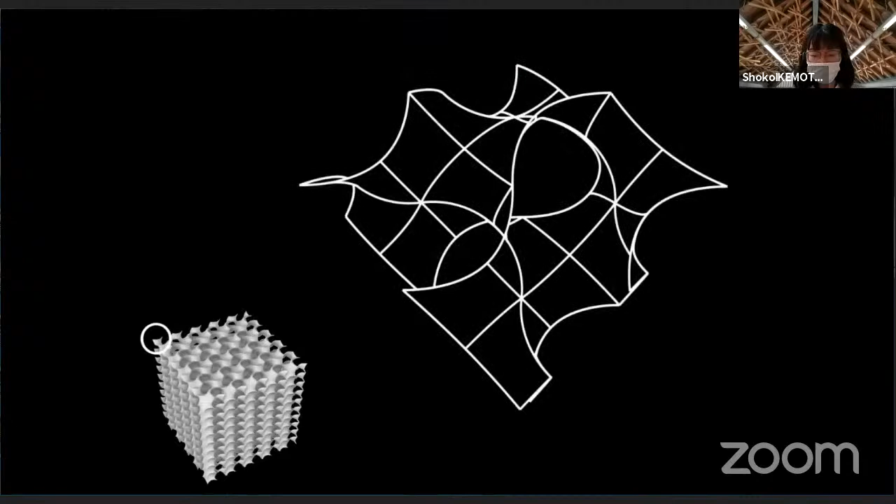So then, Shoko, can you share your desktop screen and start the presentation? Yes. I considered the smallest surface that makes up a gyroid to be a module and used an agent algorithm. There are two types of module, one for station and one for traffic. This is one module, and this is a smaller module.

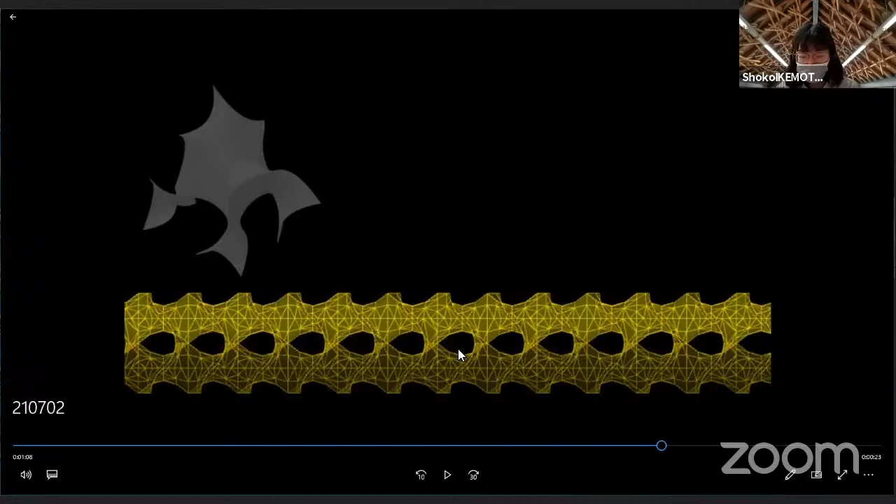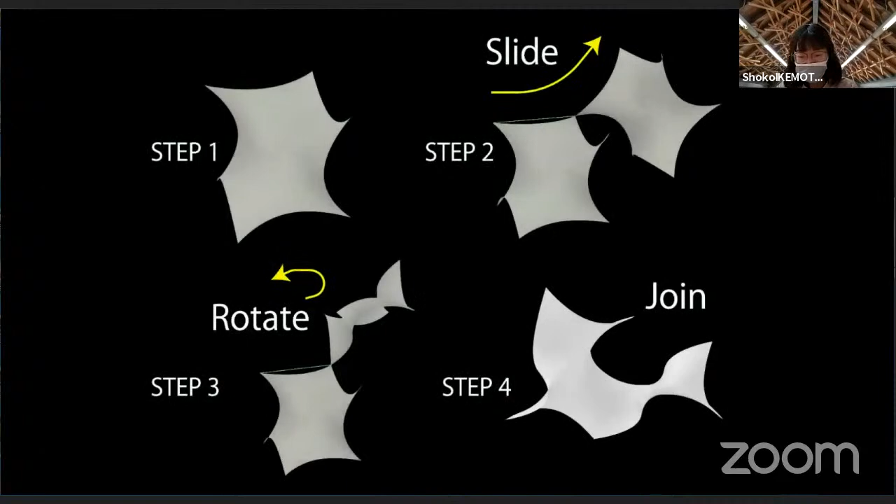The modules are connected to each other by repeated sliding and rotation. The large modules that make up a station form a cube, and when they are connected, they form large structures. That's all. Thank you. All right, thank you very much.

I want to give you feedback in a general architecture project feedback way. You started with the idea of the gyroid, using that form as a starting point for thinking about the module, then you developed connectivity between them, expanded the idea to movement, and introduced two defined types of module.

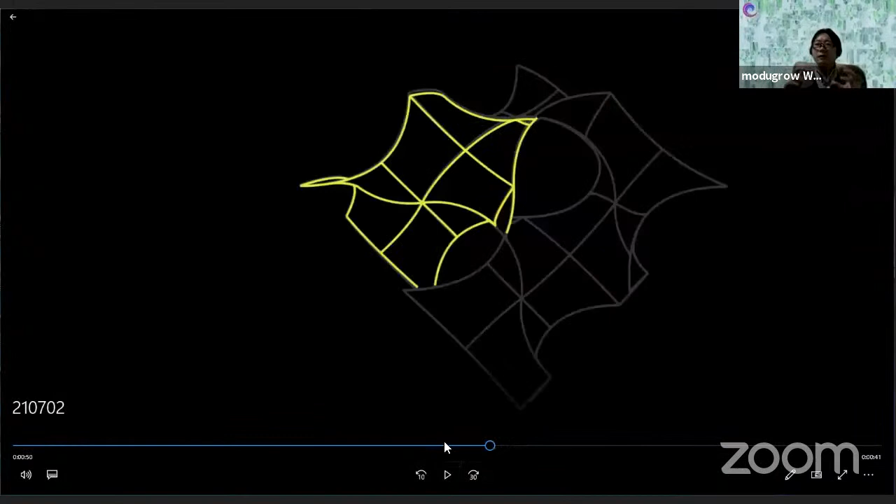First, a technical question to clarify. I see the yellow or orange-ish one is a sequence of gyroid surfaces, and the cube is a more volumetric aggregation. But how did the agent of a big cube move? It looks like overlapping cubes. How did the cube agent move, or how did it grow in time?

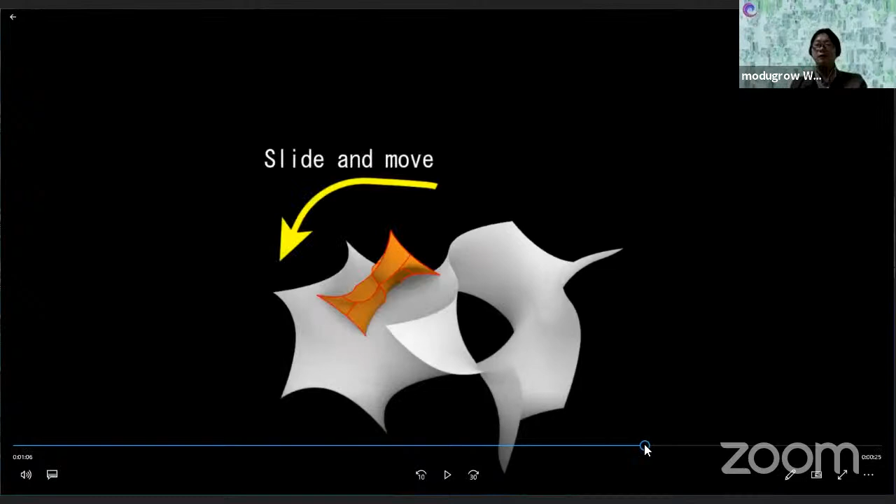I think this one is a linear agent aggregation, right? The yellow line thing. Can you explain the cube agent movement? What's the rule you gave them, how are they moving, and how did they become that aggregated cube? This is the transportation line, so agents move on this line and between stations.

Right. Inside the station, you show the animation of agents moving in almost a random way. Is that actually random movement, or is there a specific angle or direction? How do you design that movement? Randomly. Okay, random. Then how did you put the big cube geometry on each random agent?

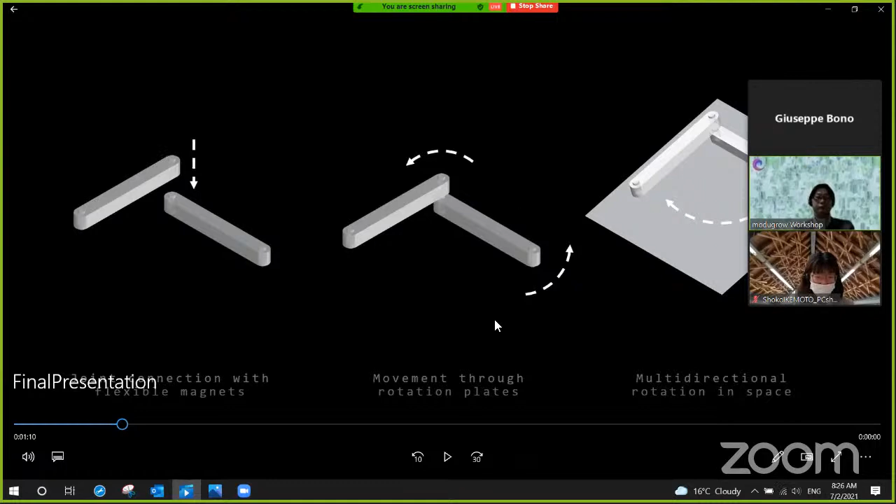Yeah, that's all. Good. All right. Can you talk about the project, explain? Yeah. So basically, the concept was to start with a very simple module, like a simple stick, connected to each other with flexible magnets. And basically, the overall 3D structure is created by a surface that is twisted in 3D space. There is an incremental rotation that happens, always based on the reference pattern, which is a hexagonal pattern. And the more the pattern grows, it twists,

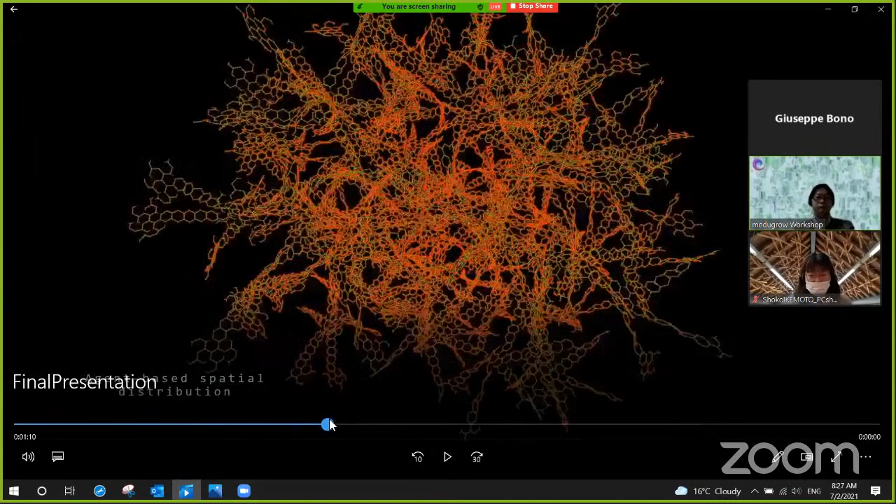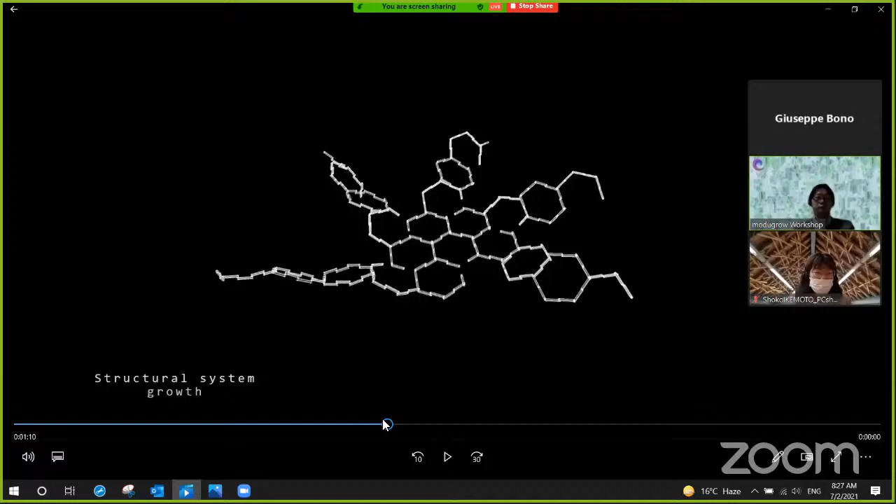and then it creates this sort of cellular particle structure. And then to that structure, based on the agent location, the module has been applied, and then the module was simulated for how it should work in reality, so the overall structure is this kind of lightweight structure, and yeah, I think this is the project in brief.

Okay, that's quite interesting, and especially your module is kind of simple, simple to the degree that it looks like you could build it within some time frame. Plus your agent or module is super simple in terms of movement, simple realistic movement, and the rule is also simple, like straight aggregation and then a 60-degree turn, and then you have a slight twist, which makes the whole structure a very specific three-dimensional formation.

Which is also interesting in a way, and I wonder if there is actually a functional use of this form or not, which maybe you can keep thinking about. But actually, you are in the thesis or research group working on the modular robot, right? Yeah. So you might build some type of robotic module in a similar way, like this rotation-based thing, and develop some mechanism for that. Yeah. I'm at the moment doing something similar to this, but in a construction environment, not a space environment.

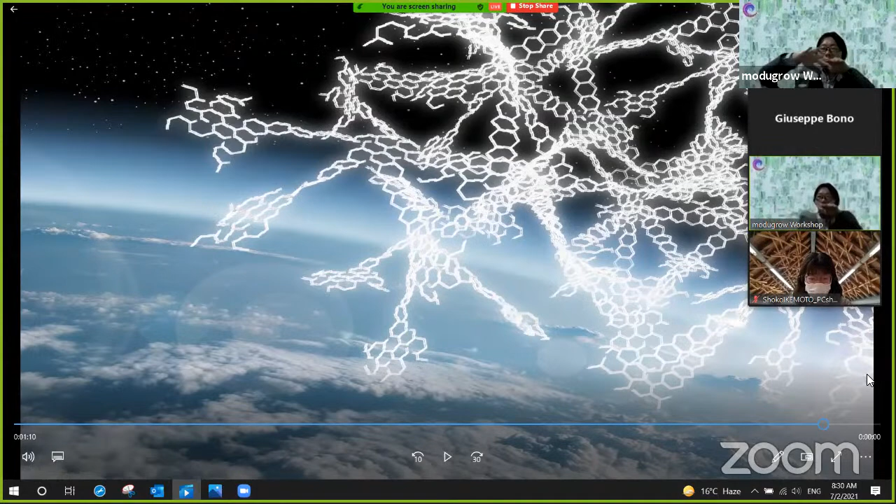Yeah. All right. So currently the complexity of the form is achieved by the introduction of the little twist, right? By twisting, it shifts the plane to grow and it creates three-dimensional form. But still, your base system is a hexagon shape, so there might be many more ways to go out of the hexagon system, and the aggregation hexagon system can be developed further. So I think this is just one of them.

But the module itself can be any angle, right? It can be triangle, it can be square, or even circle. This agent or module system, your robotic module system, you are assuming can make any linear, rotated structure or robotic formation. So I think that would be interesting for you to really develop further with the possibility of your module.

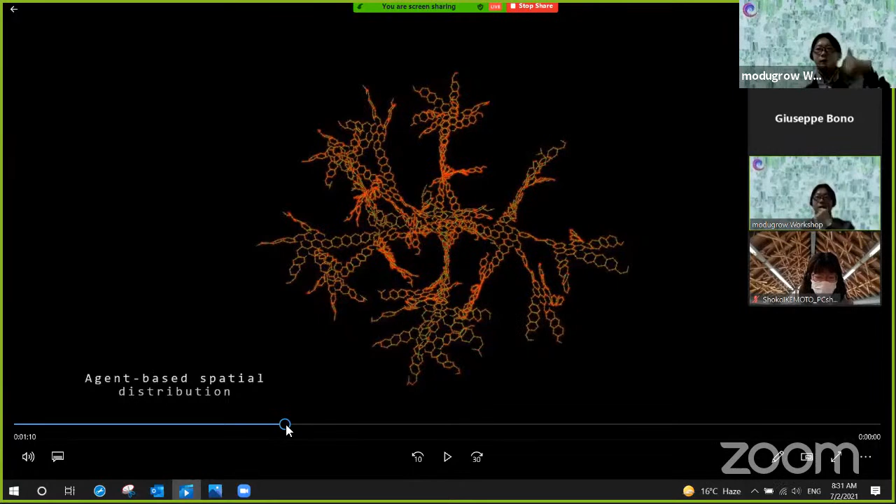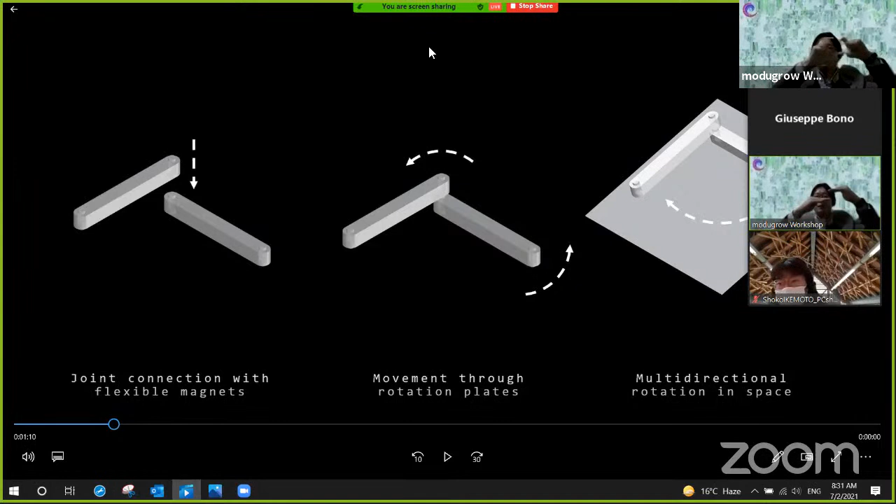And actually, I think the more interesting thing to think about is when you develop the module further, can you show me the individual module explanation image? So they are attached by a certain joint, either mechanical joint or magnetic joint, and then they rotate. But first of all, one major issue is that when you have a sequence of modules, they are attached on the top and the bottom, right?

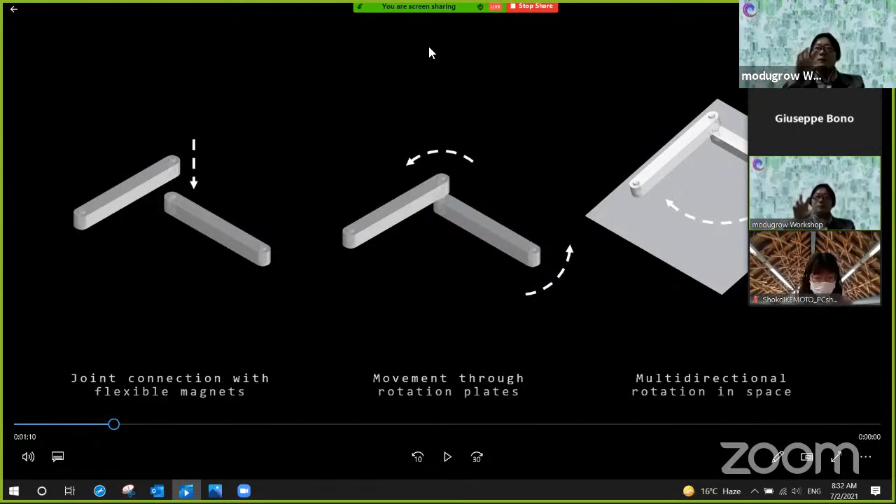Then next is top. So when this one is moving along on the top level, actually this is already moving. Basically you have two layers of modules, a top layer and bottom layer, and if the top layer module goes on the top, this module wants to go to the bottom layer at the end because you are running on top of the top module. But anyway, at the end you still have a problem, right? You still have a geometric and physical problem of how they reach the end of the module.

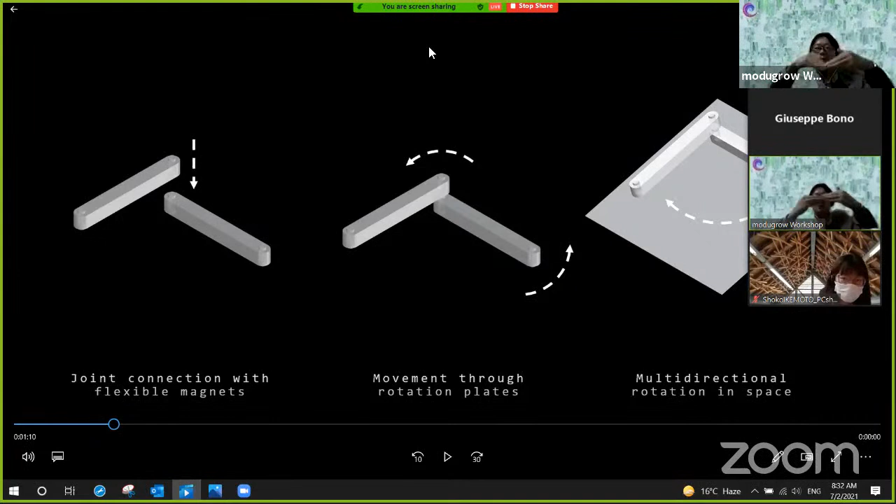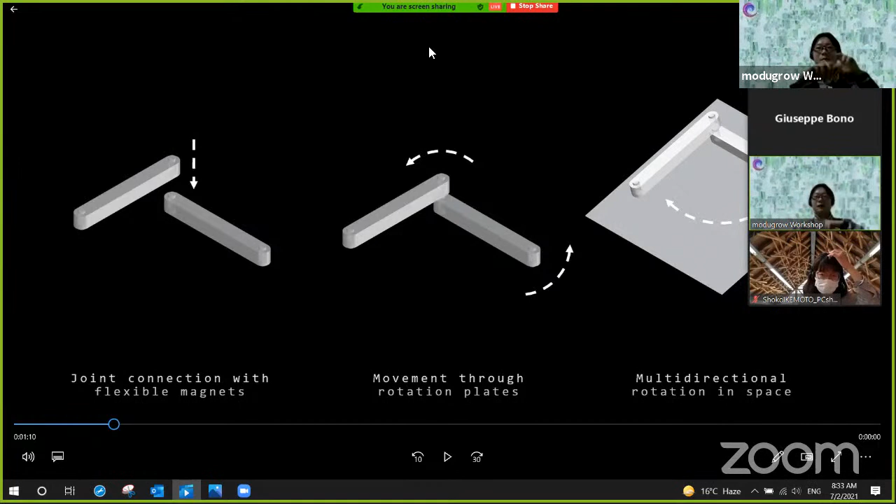What I'm saying is that I don't know how to solve that, but there should be a certain way. Then when you do that, the module connection or module mobility or constraint will change. It might give you a very specific tilting angle; possibly the rotation joint might not always be perpendicular to the movement, and that might give very specific constraints to your agent system, but that might also make the whole aggregation look interesting, possibly.

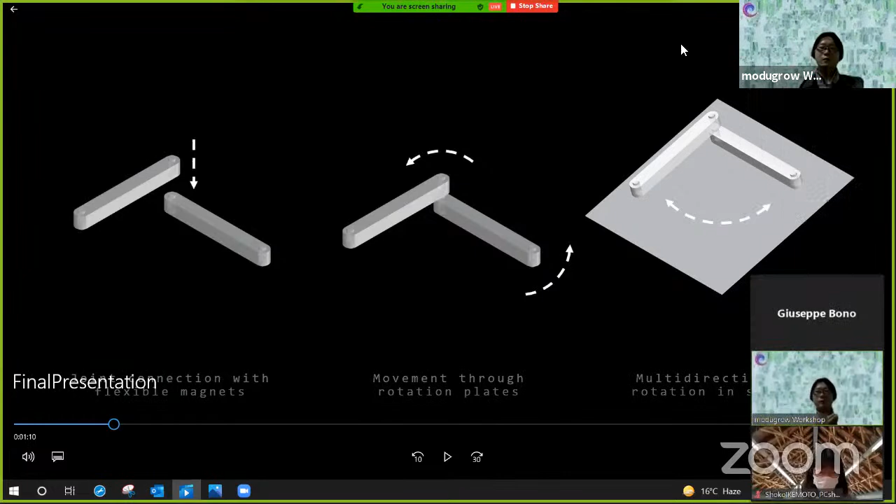Then another thing: in your aggregation you introduce the twist angle system, but if you want to implement it in this modular robot system, they need to have some twisted angle somewhere, right? So either you can introduce a second type of module which already embeds the twisted angle somehow, or an already twisted module can be introduced. Although in that case, you need to think about how this guy moves around the other agents.

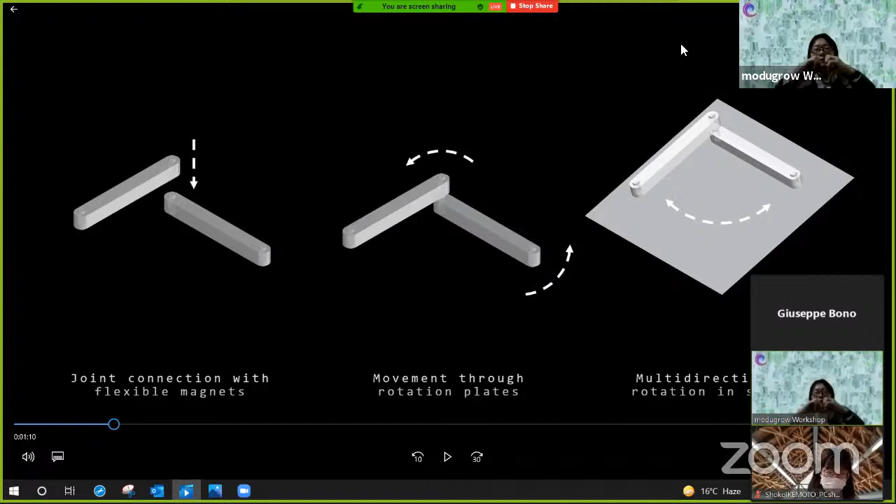But anyway, this kind of thing is going to limit your agent behavior, but also give you a very specific opportunity to aggregate in a very specific way, which would be different from the current aggregation, and that would make your aggregation design more unique, feasible, and interesting. So yeah, it would be nice to really look into the mechanism and then change the agent to respond to or accommodate that.

I think the way that I wanted to move forward with this, and also with what I'm doing, is to try to make it feasible, something that can be built. So looking into this problem that you're saying now is definitely probably the next step, because this design now is obviously not feasible, because you've got to move on different levels, so it's not exactly 100% buildable.

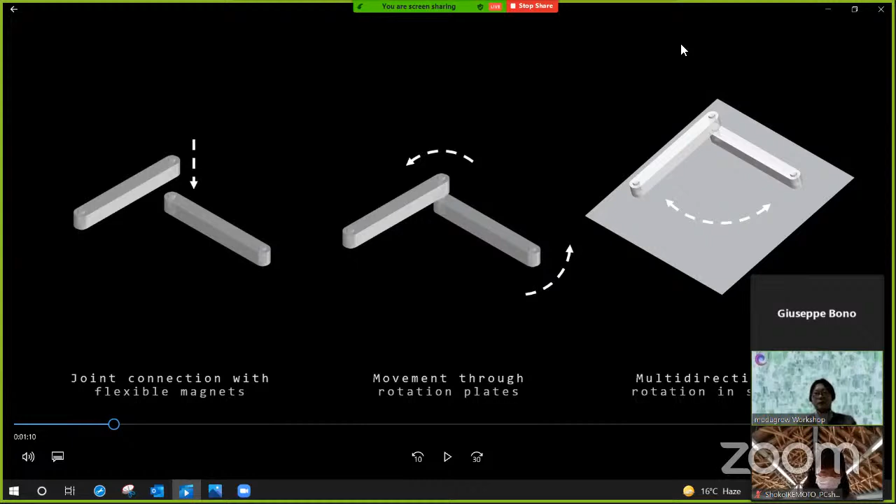Sure. Yeah, I think that's a challenge to solve those mechanisms, but at the same time, a design opportunity to extract a specific condition to apply to the behavior rule, and then that would make a really unique result.

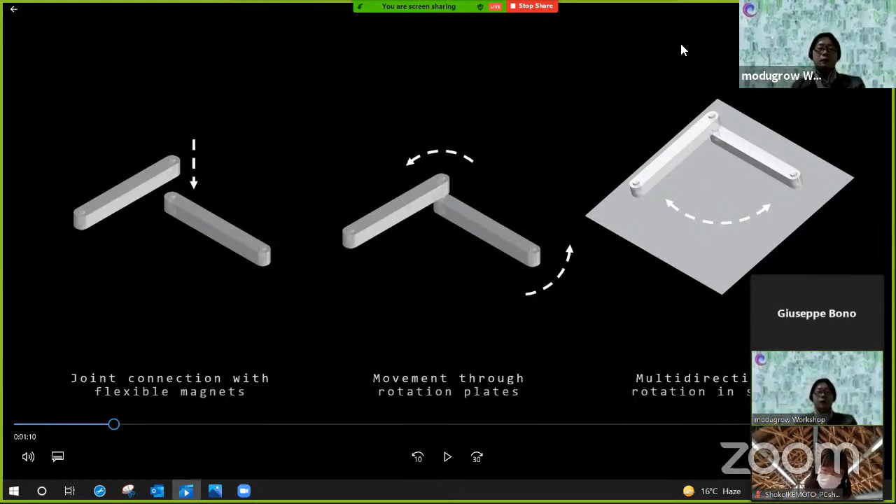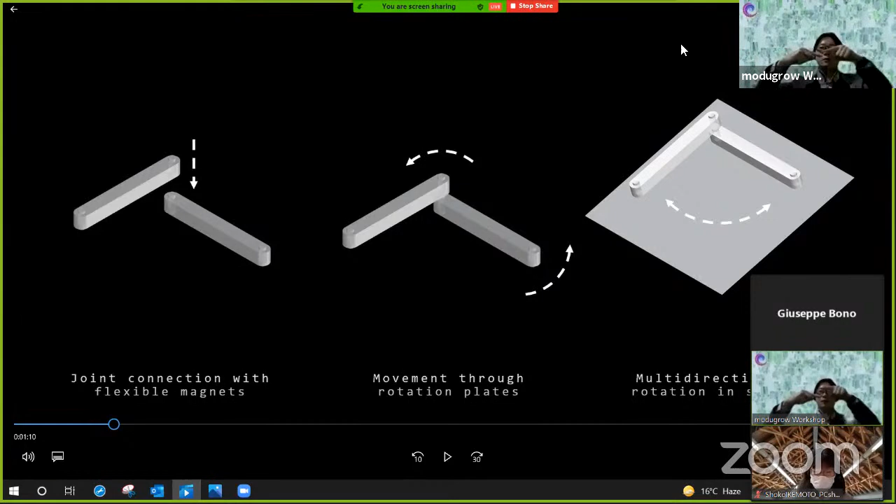Actually, I want to just add one more major potential problem / design opportunity: branching. When you want to put a branch in your hexagon system, branching is one line going to two, so you need to accommodate one joint which can have three directions of those modules, right? So in that case, you might end up having three layers of this linear joint. This animation has kind of skipped that part. They are kind of overlapping right now.

Yeah, but you kind of need to figure out. This is a part where the current joint system or movement system doesn't really accommodate that condition yet. But you might change the joint system, or how the module climbs slightly up or down to be on the third level. If you figure that out, you'll have a different constraint or limitation, but that also gives you a very specific shape. So that would be also interesting to think about.

Yeah. Good. Well, actually, one quick potential idea is you can also introduce a different module which already has a branch inside. Most of them are linear modules with two attachment points, and you could have a more triangular or three-arm one; it can walk along it with the same joint distance, so it can still walk along it. But when it stays there, there are already two points to stick to. That would be also interesting, a multiple joint system which clearly encodes the branching behavior, etc. So that would be interesting too.